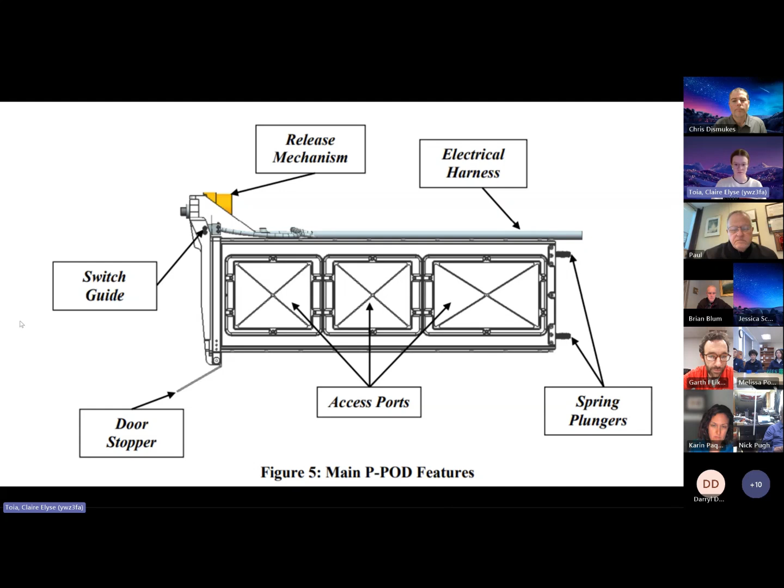So as an introduction to some of the parts, we have the outside portion. This is usually called a pod launcher, as you can see in figure 5, main pod features. This is what would be attached to, hopefully, the ISS, is what we're aiming for. And there's a door, and eventually, whenever we would program it or set it to release, it would release the 3U satellite that would be inside, which is this. On the right, you can see a 3U satellite, and 3U is 3 CubeSats long.

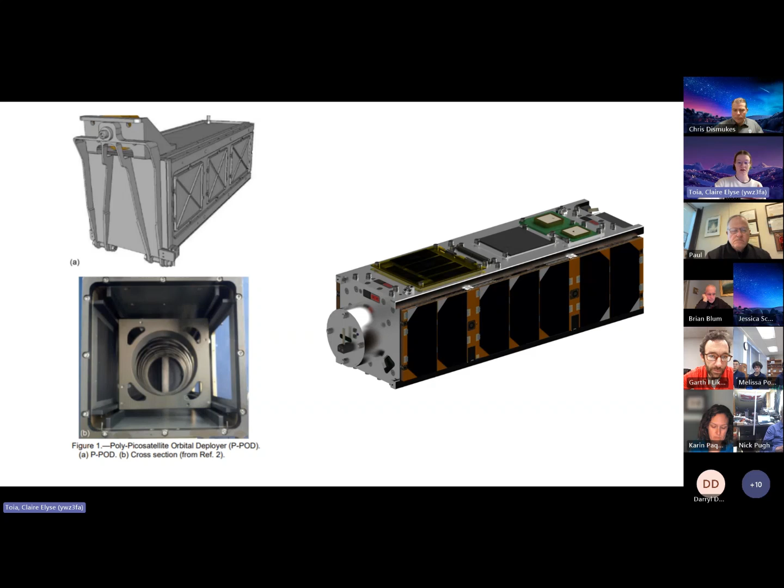So our full product is going to be, I think, a little over 13 inches. You can see on the right, we have the 3U with a tuna can on the end. And then on the left-hand side, you can see that circular hole. That would be where that tuna-can-looking thing goes into. And there's a spring that's attached to it. So when it's time, the 3U satellite would get released out of the pod launcher. And inside of the pod launcher, we have the SlimSats.

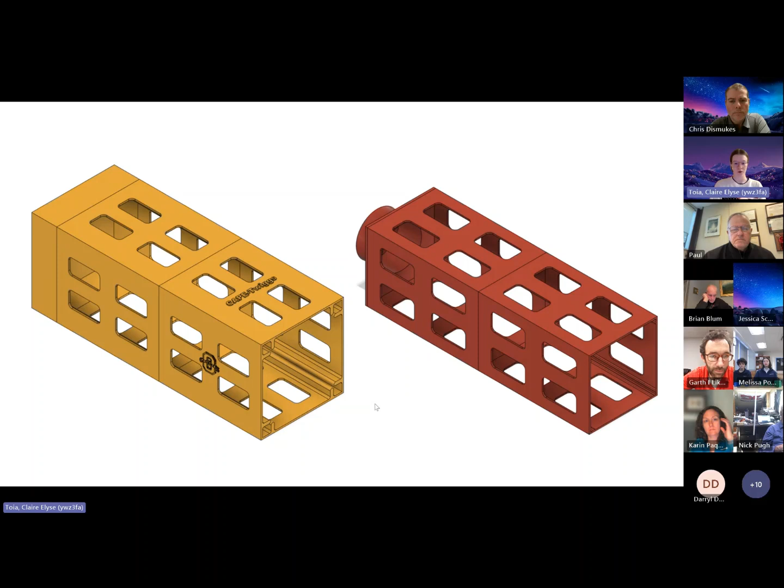And then I have another picture showing a little bit more about the SlimSats. These are the things that would get sent to you. There's no circuit boards on this slide, but the idea would be there's circuits on them with sensors. So you can do data collection of GPS, RF radio, a couple other things. It depends what sensors and circuits we get on there.

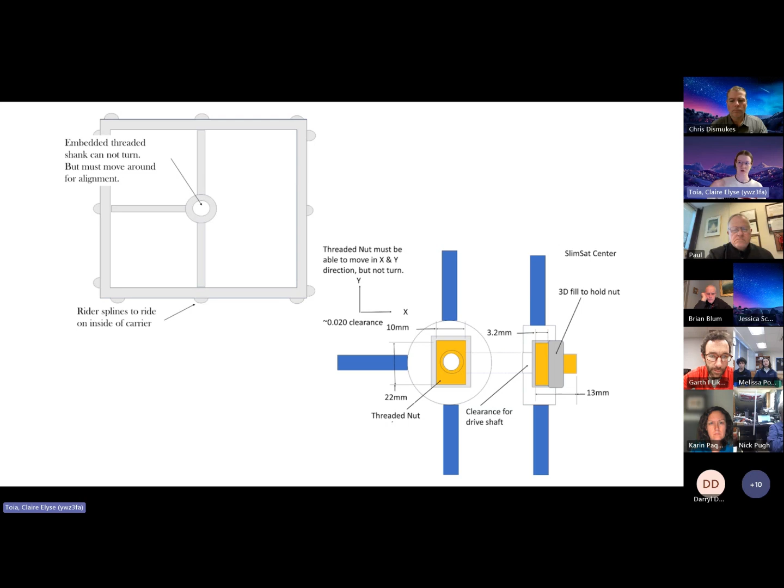But the idea is a nut would get embedded in there somehow, and we have a long rod, and as the rod spins, each SlimSat would move forward, and eventually once it hits the end of the rod, it would come off the rod, and that is when the SlimSat would be released, and it would go on its own orbit, and it would start collecting data.

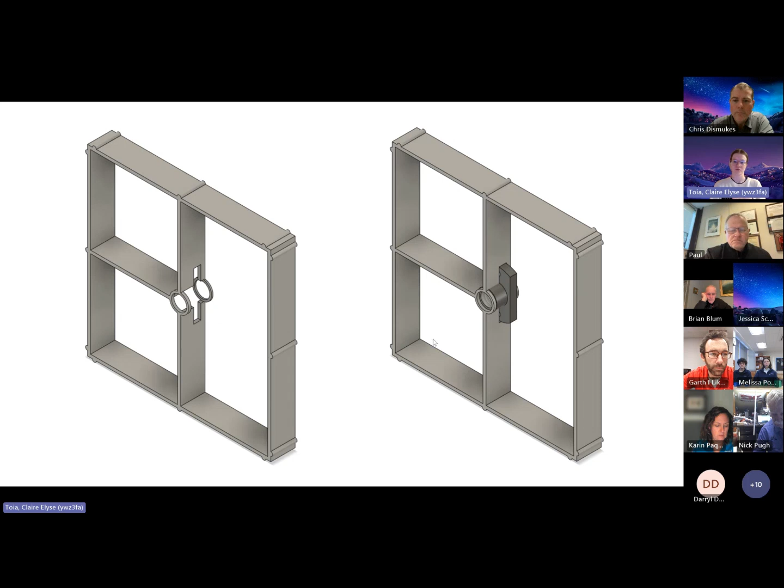So this is another photo of the SlimSat. This is what we're currently working with, the model idea we have. I also have a printed version here. I hope you can see it. I can't see my camera right now, but you can see there's an area for the nut to go into, and then on the right, you can see where the nut would go. And again, there'd be a rod going through it, which is what this shows.

So imagine that there's a bunch of these SlimSats with a bunch of nuts. In total for the 13-inch product, I think there'd be about 20 or so. But this is just an example of how it would sit on there. The rod would rotate, it would move forward, and eventually release.

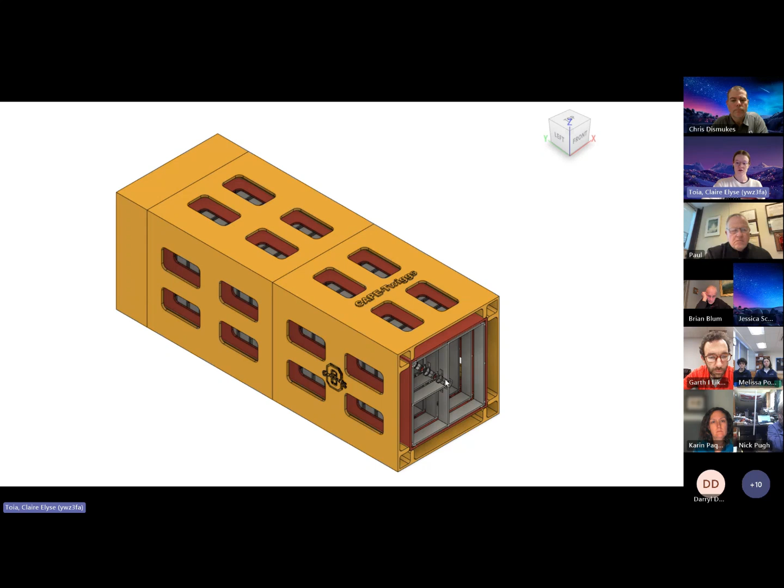Does anyone have any questions about this stuff specifically before I get into the CAD stuff? You can also ask questions later on when we have the breakout room. But if there's no burning questions, I'll move on to the CAD.

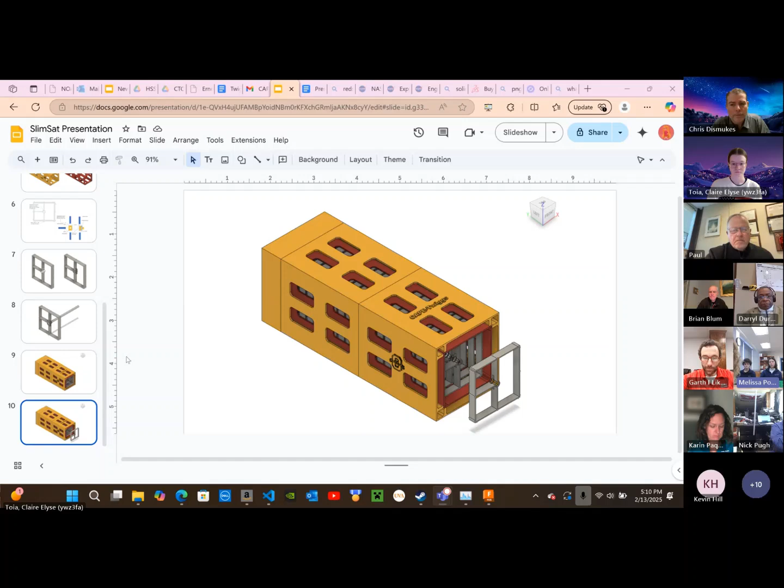Claire, while you're moving on to the CAD, I want to make a comment on your incredible work. She modeled the parts that are actually like the brass and steel parts, and you're able to get these files and print them and secure them together to get the full idea of the build. All right, that's all I wanted to say. Yes, that is a good addition.

I will be uploading these files to a Google Drive that Garth created, and you guys should be able to print them from there. I'll talk more about 3D printing very soon. The files come in half sections because printers, especially the ones that we have access to, aren't big enough to print a 13-inch long thing. I see a hand raised, so I'll take that question and then I'll move on to the CAD.

Thanks, Claire. First of all, wonderful job on the CAD. I was just curious, what is the current thickness of the SlimSat? The SlimSat is modeled to be about half an inch. Okay, thank you. So we can fit a lot more of those inside the 3U than if we had three 1U CubeSats.

Thank you. Okay, thank you for the question.

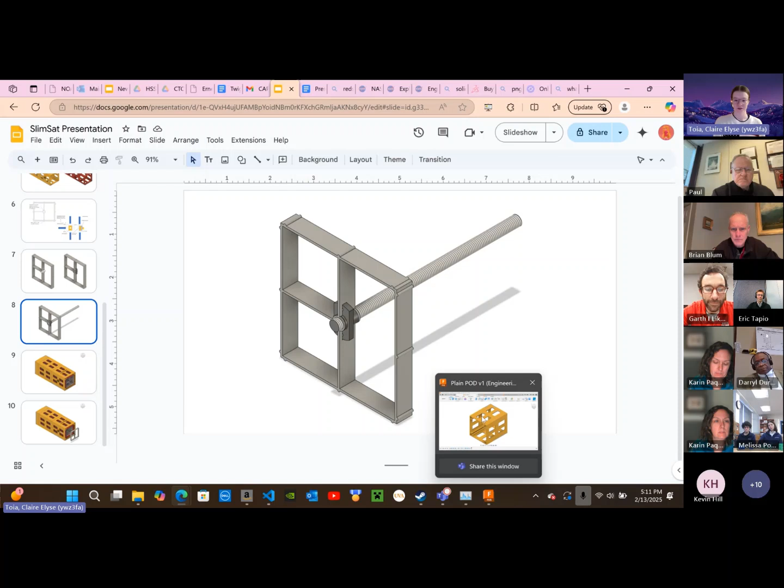So now I'm going to move on to CAD. I can answer more questions about it in the breakout room, but I'm mainly going to be showing you how to add a logo to a file so you guys can customize your things. I did so for 2 of the schools. I'm not sure if they're on right now, but I did one for Tomball High School.

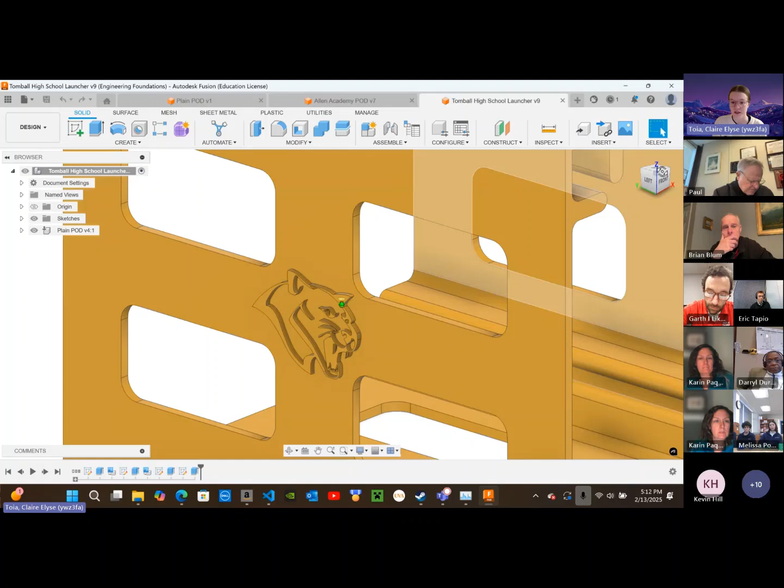You can see that it has the name and one of the logos, and then there's also a logo over here. A nice, I think it's a panther. I could be wrong though.

Claire, I do think both teachers are on, Jessica and Stephanie from Tomball and Allen Academy. And we did print for them and deliver in Houston. And they can speak for themselves, but they were excited and they really appreciated the work.

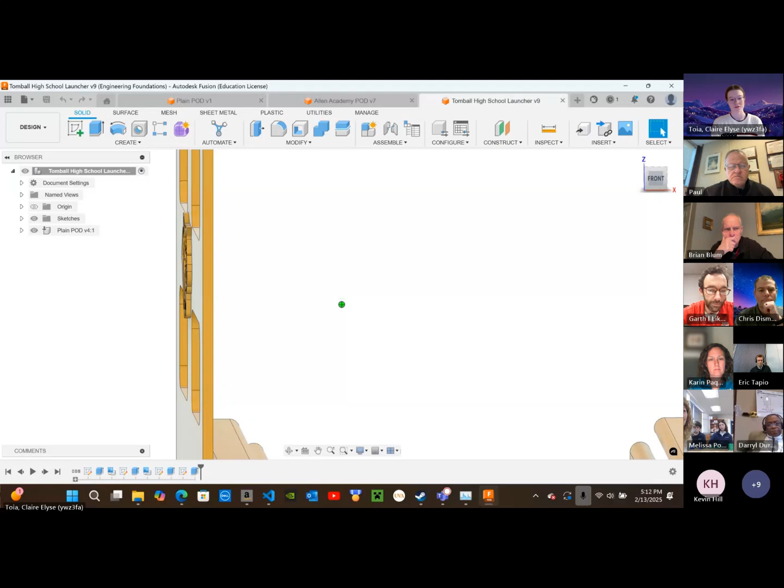So yeah, we got them these, neither of them have printers. So if you don't have a printer, we can work around that. But if you do, you can make edits on your own and then print it. You can see that it's slightly extruded from the side. So when you print it, you have a little logo and it's just really cool and it can make you feel more part of the project. And it's fun to show people that you have customized the product.

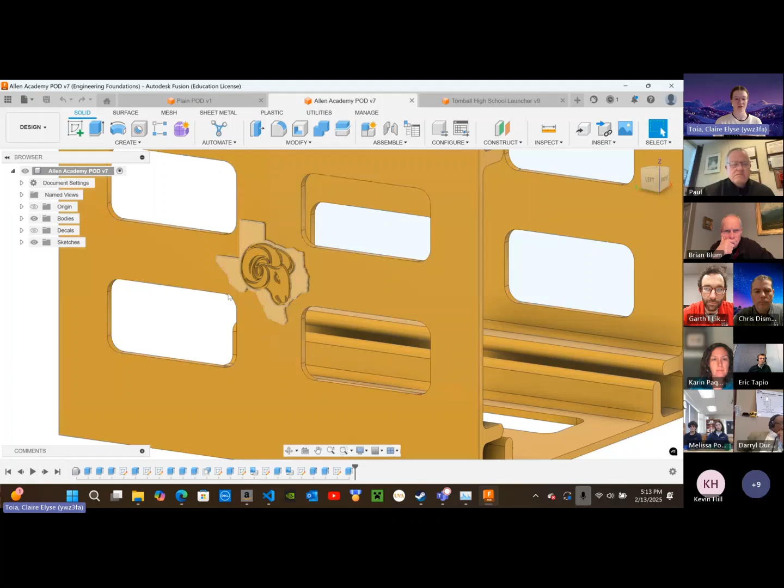Same thing for Allen Academy, the nice Ram with Texas. So I'm going to show you guys briefly how to do it. I can answer more questions later. There's 2 main ways I have found. The first and easier way is to take a PNG or a JPEG and convert it to a file called an SVG. I just do that through an online website and then I download the SVG.

There's different CAD softwares. I'm using Fusion, but I would assume most others can do the same thing. There will be a section where you can insert an SVG. I'll insert it from my computer. I have it right here. We're going to be doing a rocket. You're going to have to probably scale it down. This one, if you can see it in the bottom corner, is very big. So we're going to have to make it much smaller for it to actually fit on this.

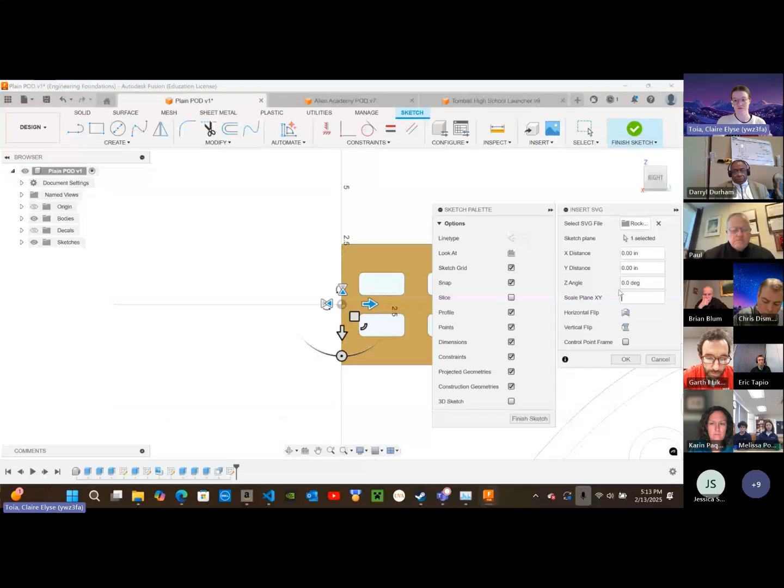So we'll go 0.1. Heck, we might even have to make it smaller. This is a very big rocket. Okay, I'll make it even smaller. Okay, that's a good size. So you would place an SVG. I recommend doing CADing with a mouse. It is easier with a mouse rather than a touchpad.

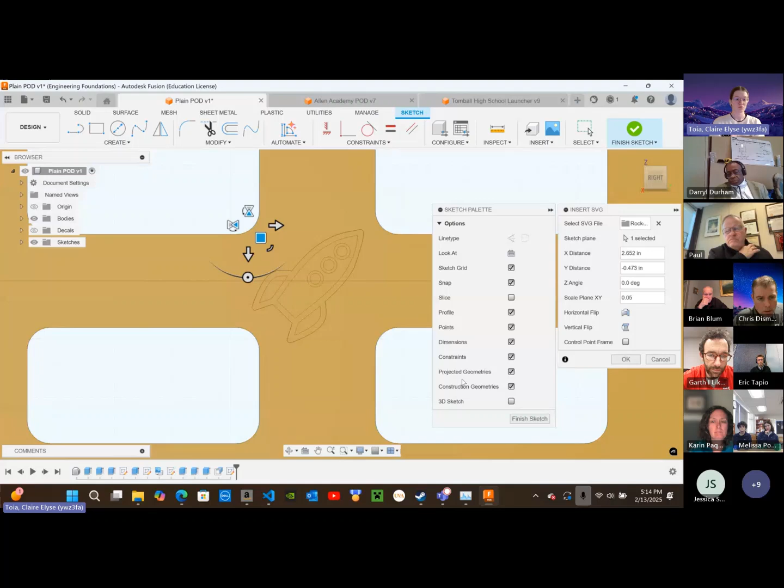So this is a successful SVG. I have tried it with other JPEGs and PNGs, and it is not nearly this clean, which is why I'm going to show you a second method. It's much easier and faster if the SVG works like this, because all you got to do is click OK. You'll see that it shows up. You can see the green outline.

I'll click Finish Sketch. And again, I'm using Fusion, but I assume most softwares have some sort of toolbar up here. I use Extrude. I click on the stuff I want to extrude, so it'll select the sketches. You can see them getting highlighted in blue. I come over here, I click join because you want it to be a part of the same thing, the same component. If you click new body, I think it would still print fine, but I think it's better to click join. And you can always look up the difference between join and new body and new component.

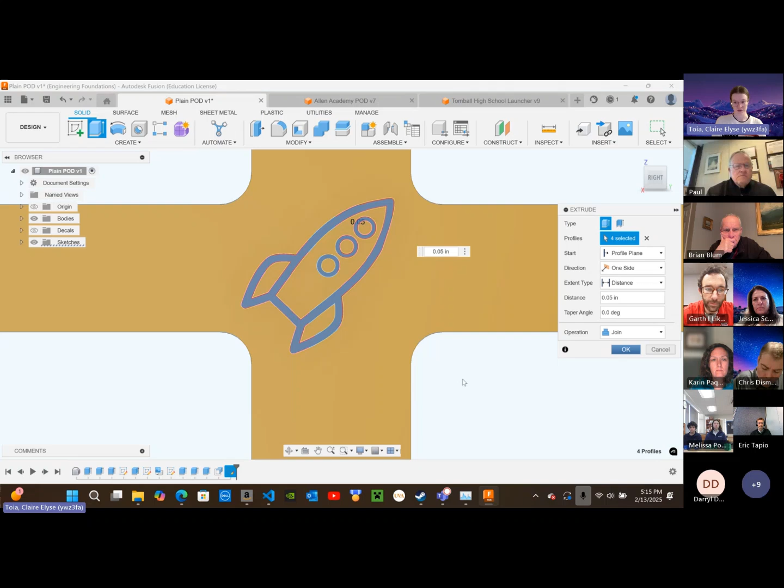So I put a certain amount, I go with 0.05, and lost my mouse. I click OK. And sometimes, depending on the complexity of the logo you are doing, it may take a second to load. I'm hoping Fusion will work with me here. There we go. So you can see that there's an outline in black, but now you can see that it's slightly raised away from the surface. So when you would print it, it would print like that.

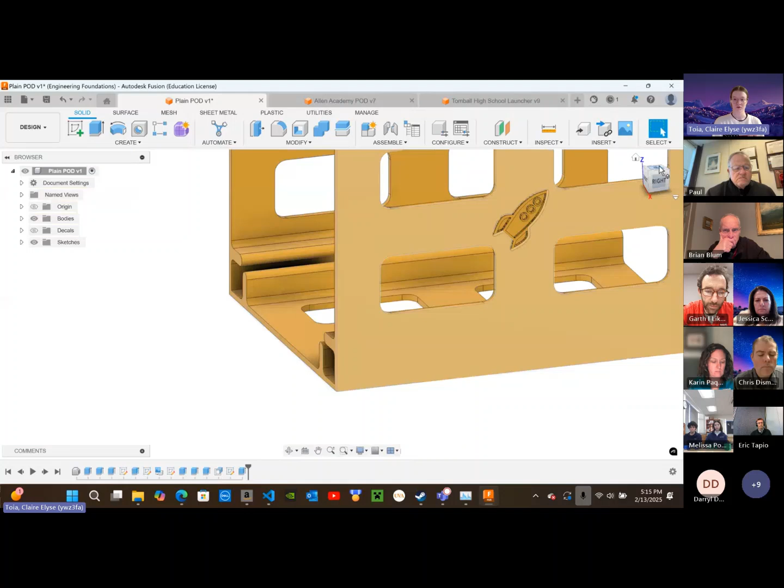So I'm also going to show you a quick, well, depends how complex your thing is, but if the SVG does not work, you can also do it. I have found, and this is what I had to do for Allen Academy and Tomball High School because their logos were too complex for the SVGs that I tried to create, I insert it as a decal. So that you can do with a JPEG or a PNG as far as I know.

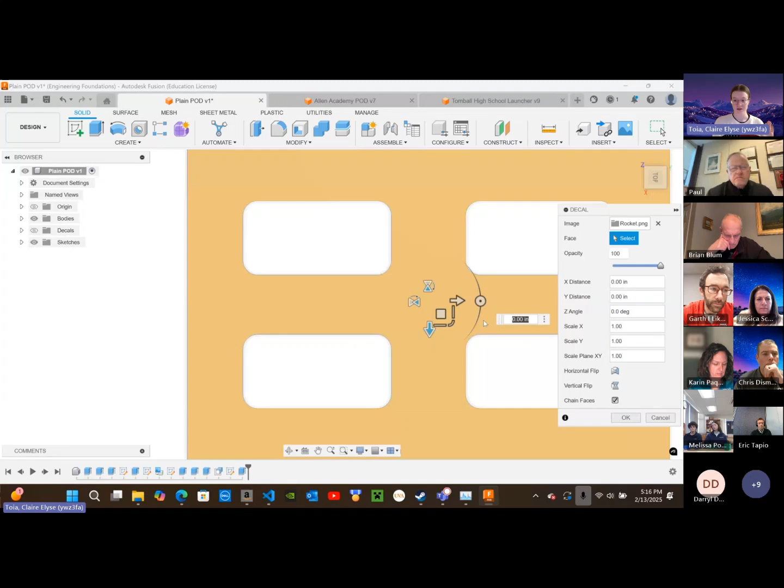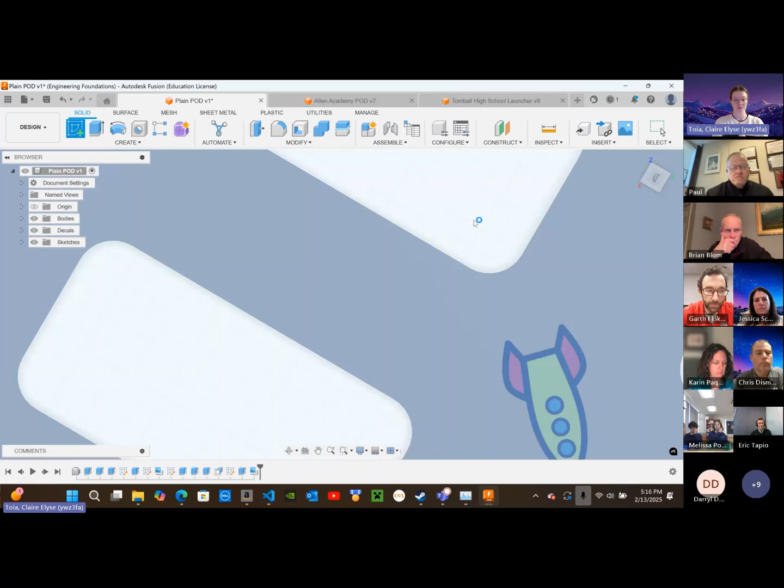You click open, you select a face. We're gonna have to make it smaller again because these things usually start pretty big. So you can see there the rocket, and it's colored because it's a decal. So this is not what we're going to be showing. Let me turn on decal so you can see it. So we see it, we go to sketch, we click on the same face, it decides to rotate.

And then you're gonna trace along it. I'll try to make this pretty quick so nobody gets too bored of it. My favorite sketch tool is this Fit Point Spline because it's really good for making curved lines. You guys can see the green lines starting to appear. And you guys can make these as complex or as simple as you want. As long as you have a sketch to extrude, it should work the same. I recommend trying SVG first. It will usually take less time because you don't have to go through and trace it all out.

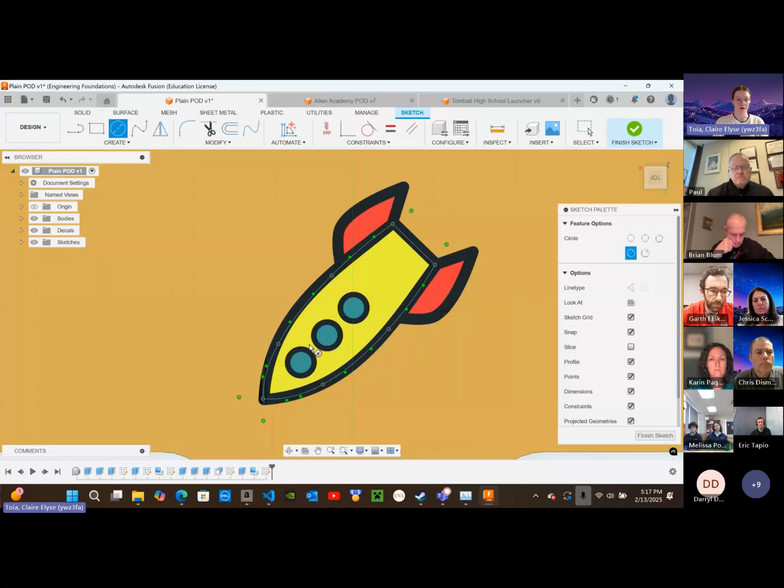There's also, if there's a regular shape like a circle here, you can click the circle tool and then it's really quick and easy. Bam, I made a circle. Bam, I made another circle. And a third circle. And now all that's left are the fins, which we'll do quickly just so we have a complete rocket. Click that.

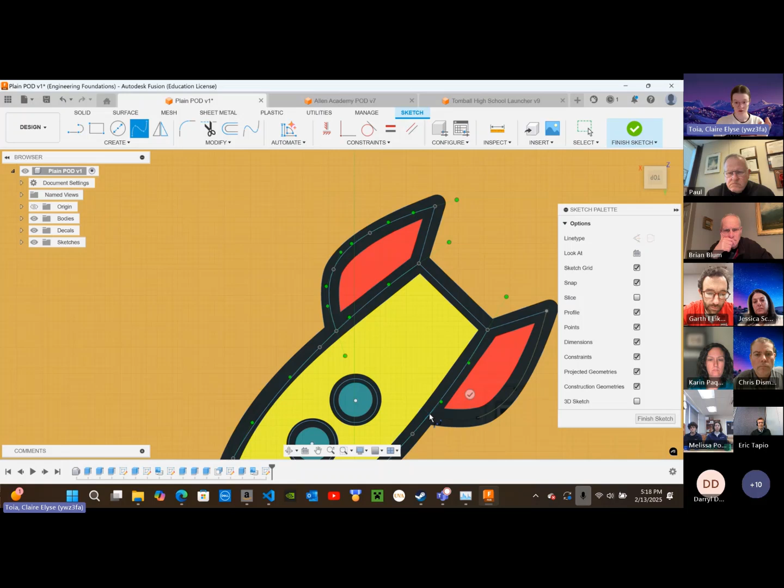And there's different tools that you can use, like I said, for doing the sketches. While Fit Point Spline is my favorite, some people may just prefer to use straight lines, and it depends on what you're trying to trace out. You want to make sure that all the lines are connecting. If your lines aren't connected, then it won't extrude properly.

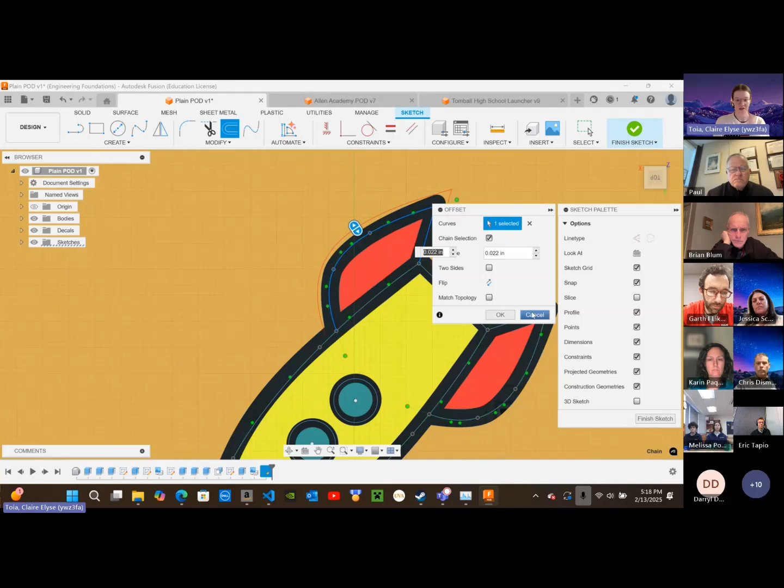There's also some more tools here. Offset, I won't do too much with it, but it is useful. You can see that it makes the same shape, but is slightly offset. So then you could just raise like this line rather than a whole face. But for now, I'm going to leave it like this. And you can ask more about the offset tool in a little bit. Same thing as the SVG.

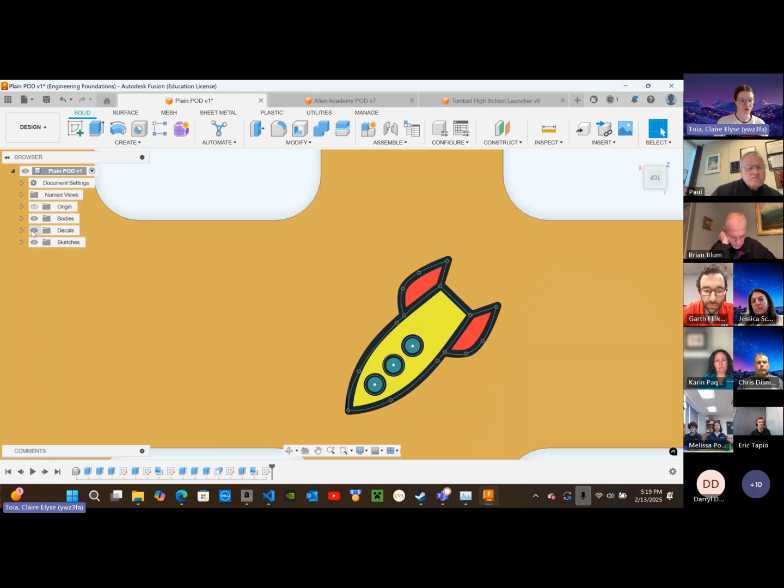Now that we have this, I'm going to turn off the decal so we don't get too confused by it. You click extrude, you click on the stuff you want to extrude. I'm going to extrude this stuff. You click join, you add the distance, click OK. Gonna have to wait for it to load a little bit.

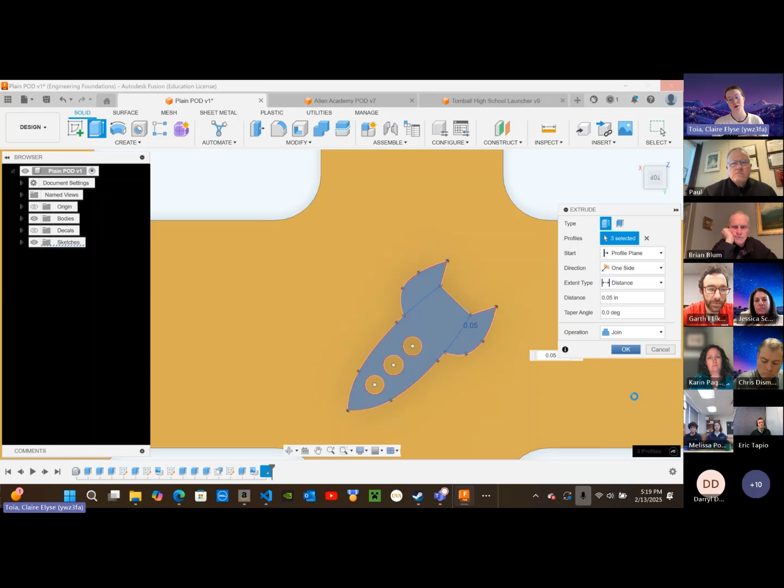A couple other softwares I know of are Tinkercad and SolidWorks. Onshape is an online website, I think, that you can also use. But as you can see, it is now also raised. It looks a little different than the other one because I sketched it differently, but you can see both of them are still raised rockets, so that could be your guys' logo for your school.

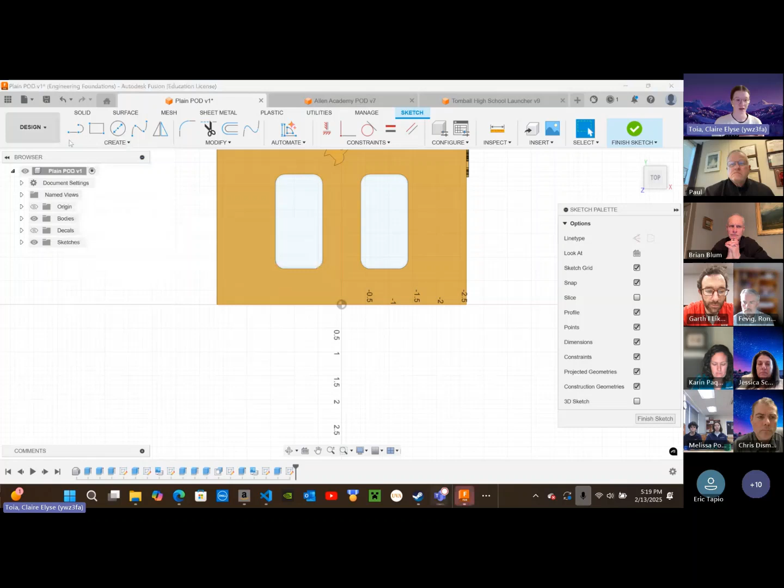You can also easily do text. I won't show text, but you can easily add text. There's a tool right here. And you do the same thing as the other stuff when extruding. You click extrude, you select it, you put a little distance on it, and it will look the same. That's how we got to Allen Academy and Tomball High School. You can see that the words are right there. So that is the end of the CAD.

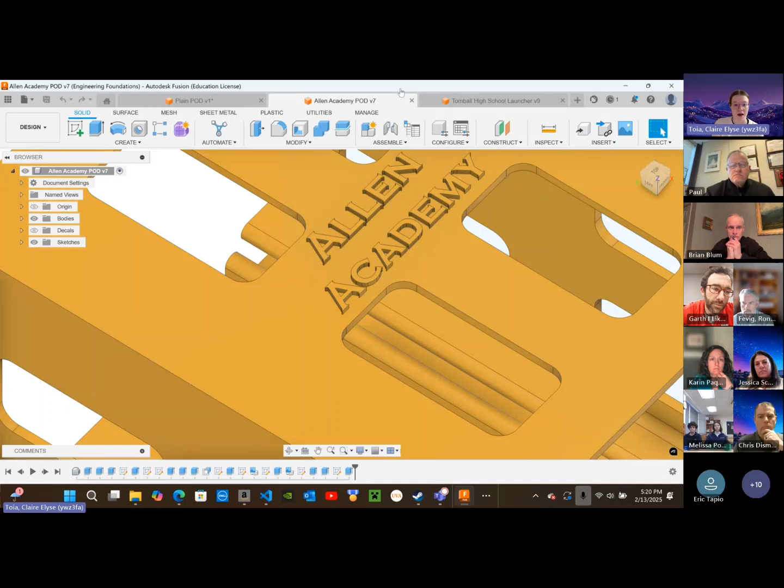I'm not going to show you guys now, but there is another step after you design stuff in CAD. You have to export it, usually as an STL file, to a thing called a slicer. I and a couple other people are using Bambu Lab as our 3D printers. We found that they're very good. They're very smooth. They have their own slicer, and you would put the file in there. I can talk more about that in the breakout room. And then once you slice it, that's when you can put it on the 3D printer.

You click print, and barring any issues with the 3D printer itself, you will then have a finished product like this. Well, finished, unless you need to do more finishing. But for what we're trying to do, this is currently our finished product. You can see some in Mrs. Pore's camera. They have a couple on the table. They have tree supports there as well. Those are very useful, but I will digress on that.

And that was a lot of info. I'm happy to answer some questions now, but I will also take questions in the breakout room, and I'm happy to explain more about what I just said or talk about anything else 3D printing.

Claire, what a great job you did. Thank you so much for the presentations. I did want to highlight the fact about getting your name on it for the participants at the school. That is a valued part of belonging to the mission, creating the mission within our school and adding names to one panel of the mentor teacher, maybe the students all working on it.